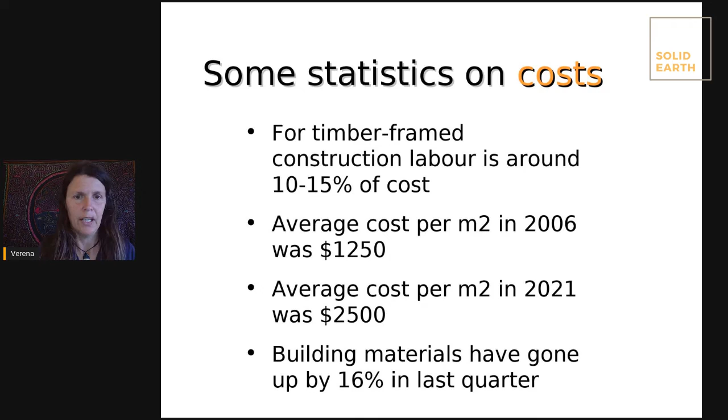We are encountering the situation where buildings are getting bigger and bigger, and there's a lot of resource use going on. But definitely, across the board, from timber through to fixings, electricals, and so forth, everything has gone up heaps. And that 16% is an average price increase.

When we're looking at resource considerations in this live stream, I wanted to focus on two things. I touched on resource considerations in my last live stream, where I was talking about different building options when you're looking at natural materials. So maybe you want to also check that out. That was last week.

But these two resource considerations, the actual building cost and the environmental footprint of the building, I think should be looked at hand in hand, because the way I see it and feel it, we are not really separate from the environment. So cutting building costs from a wallet perspective is important. But if it comes at an environmental cost, or if it then brings up your costs while you're using the building, you need to look at the whole picture, in my opinion.

Sometimes the initial costs will be a little bit higher, but you will actually be saving costs during the lifetime of the building. So I really encourage you to do a wholesome analysis when you're looking at cost, and at the same time acknowledge that initial cost, mortgage and so forth is really important, and it is important not to overextend and to be realistic about that.

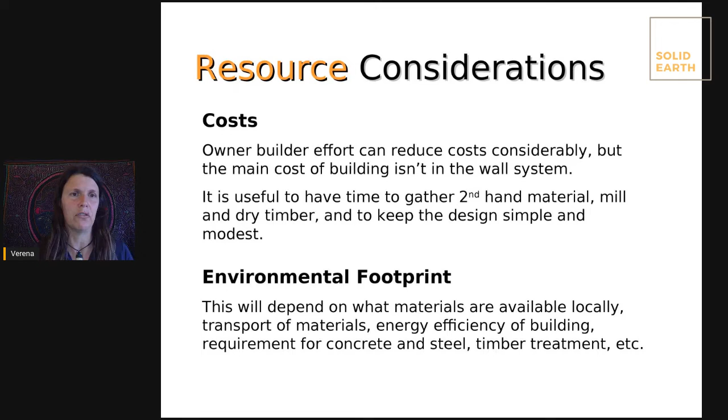I know it is opinionated, and I have received flak for that, but this is my bottom line when we talk about resource considerations and saving resources. In saying that, I am not just standing for small buildings, unconsented buildings, or small relocatable buildings. In my professional experience, I have supported people with a whole range of different types of buildings.

Personally, I like good quality. I like safe buildings. It is really important to me that buildings are built to standards. I feel that the building standards and regulations are there for a reason, and they're mainly there to keep people safe: that the structure is safe, that there's enough insulation, that there's enough weather protection. So my professional baseline is that I do like good quality buildings, and that sometimes brings the price up a little bit.

On the other hand, I have been involved with many different types of buildings, from very experimental, non-consented buildings to very expensive builds for clients, and the whole range in between. As such, I can compare things a little bit, and I am not saying that unconsented buildings are bad quality at all.

In actual fact, if I can generalize one thing, it is that all the projects that were done by owner builders were extremely high quality, especially if they were consented, because owner builders take pride in building and they have achieved amazing things. And I am so humbled and honored to have been part of the journey of some of them. And then I also see some of the smaller unconsented things are just less durable.

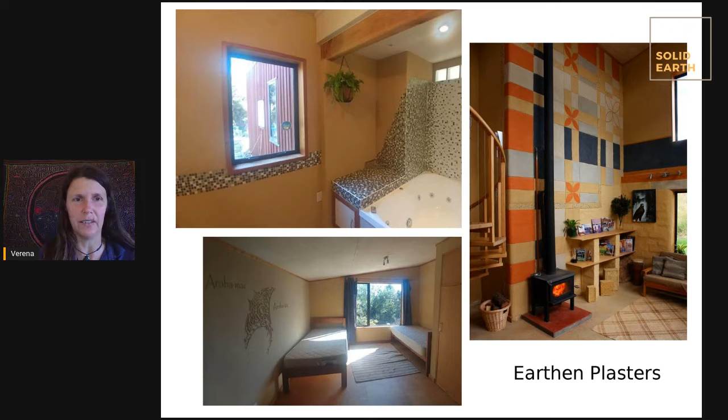We were a young couple with not that much building experience. We had earth building experience, but no timber building experience, and we learned things along the way, and it didn't take that long. It was not modest in our book coming from Europe, but it is a modest house compared to the New Zealand average. For me, at this point, just the downstairs would have been absolutely enough. It's a big house, and I love it, but now that the kids have left, it's too big for us.

And these are our neighbors. I wanted to put this in here, because this is a 35-40 square meter, one-bedroom cottage, and they bought the bricks from us, laid the bricks themselves and built the rest themselves. And their price tag was comparable to our price tag.

Was built in the same year, and it is a really nice rebuilding. So I'm sort of seeing now that the 30 square meter buildings are more accessible, easier to build, and legally. I see there's a lot of scope in the 30 square meter buildings, and I'm hoping that people will see that 30 square meters is actually a nice size, and maybe finding living models where some living resources can be shared, and then there's private space that is a little bit smaller.

So just putting this in here to show you very simple oblong design, roof with overhang, very good, durable design for the mud brick, and it was super simple. The advantage and the simplicity of the material you see here is that when you build an earthen wall, the wall system, the actual brick, fulfills many different functions. So it is at the same time structure, so support, insulation, interior lining, exterior lining.

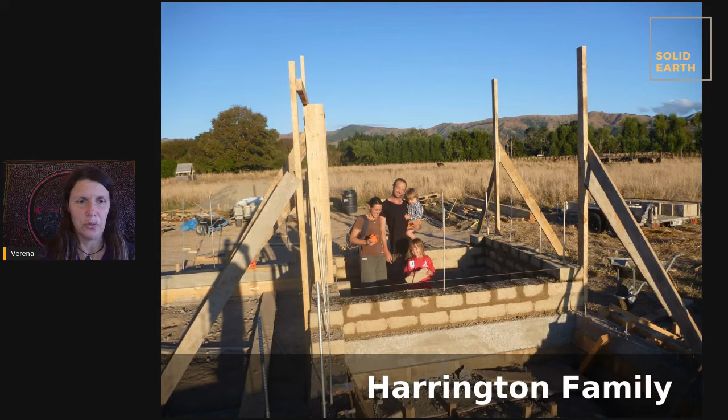And they are now on their second home. They built the second home in the same technique, so it didn't put them off at all. They love it, and they've just been in the news actually. So I am going to also link this article below, because it's up to date, and it was a nice article. So they have nice experience with adobe.

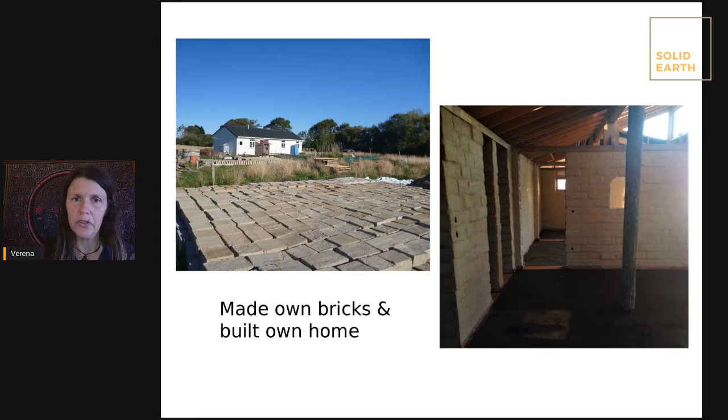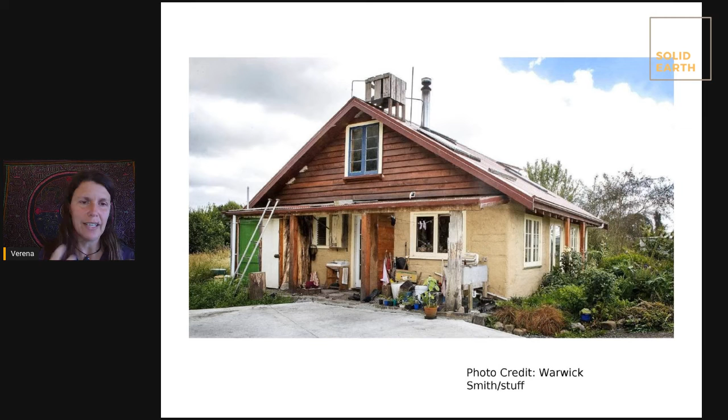Here you see their adobe production of the bricks drying and how the interior looked. As they were finishing, they put in some earthen floors, and they had timber that was locally milled. And this is how the first house looks on the outside. So it's modest, they had recycled joinery on this building. They really started collecting building materials ahead of time, and they designed the house to what they had scored.

And this is another one. So the Stavely house, I put this in here right after the last picture, because this was a similar scenario. These people, they scored double glazing cheap, because it was a run that had wrong sizes. So they started the house off with the glazing that they had scored cheaply, and they designed the house around the sizes of glass panels that they had.

And glazing, like the windows and doors, can be quite a substantial part of the cost of the building. So they managed to save a heap of money by doing this, pulled that wrong sized glass out of the waste stream, which is great. And they also decided to use mud brick. So in this case, they bought the bricks from us because the guy had a well-paying job. So he was like, I don't want to spend a summer making bricks. I just want to lay my own bricks and build the house in one go.

And that's them. So they did a wonderful job. This building is down in Canterbury. So it's doing well. You see, it was even in a place where they do get snow. It is comfortable, and they have had a really streamlined building experience where they just laid these bricks, and it didn't take them that long.

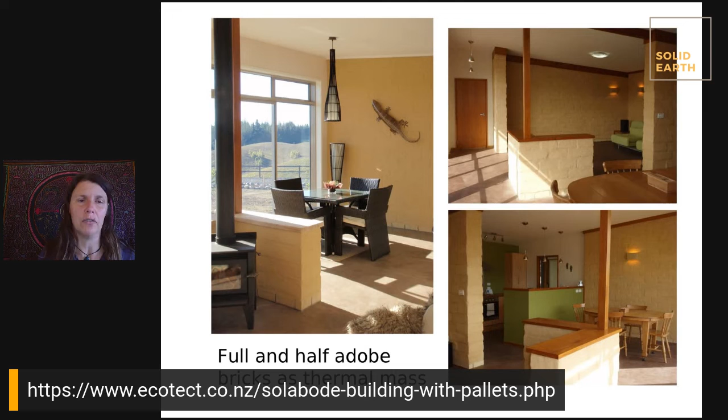He also got into another project. He was very inspired by Mike Reynolds' building with waste materials, reclaimed materials. So he went into this whole thing about building with pallets for portable buildings. These are unconsented, small, exempt buildings. And he developed a system where he was building panels with pallets, but stress testing them to make sure that they're safe. And he was tinkering around with that.

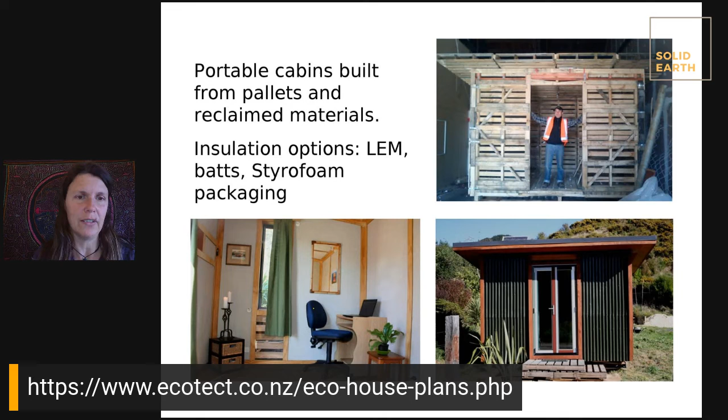And then another thing we were involved in was a community project with Ngāi Tūhoe. And while this was done for their tribal headquarters, which definitely doesn't come under the bracket of affordable housing at all, it's an absolute piece of art and holds a lot of mana. The earth building component in that building was really interesting, and it was a really beautiful thing to be involved in.

The reason why this was so streamlined was because we used a tractor to produce a lot of mix ahead of time. We hired a tractor and we made up 20 cubic meters of material, had it delivered to this place that was undercover. The time of the year was not ideal. That's why we had to go indoors. And we just cranked them out with hand molds and banter. It wasn't back-breaking. It was really a nice experience.

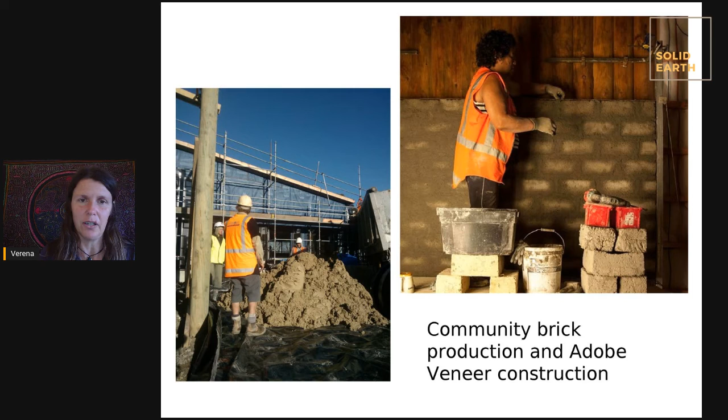So here you see the big heap of mud that was delivered for mortar. It's just sand and clay, and the lady here laying the bricks, they loved the experience, and everyone just got stuck in. And here just a couple of other photos of these types of veneer brick walls, which in this case serve a thermal mass function in timber frame buildings.

So the adobe technique can be used both for load-bearing walls and for veneers. Interior veneers, that is; we don't recommend them as exterior cladding. They're just clay-based and not fired, but they're a wonderful, wonderful material to add to any interior.